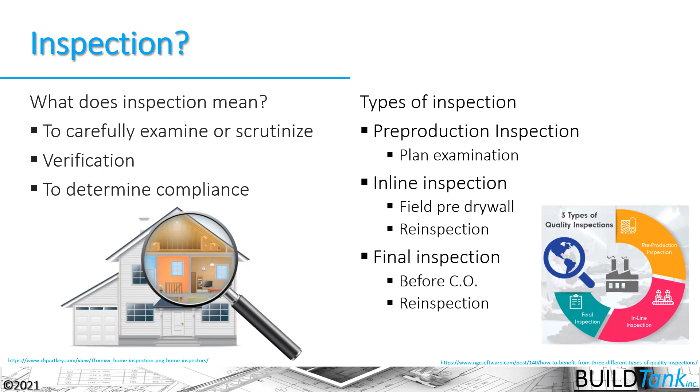So then we need to think about what's the next thing that comes up from a code perspective, and that's these things that are requirements. So things that are compulsory, things that are necessary, things that you have to do because the code says that in order to comply with it, these things have to happen in the house.

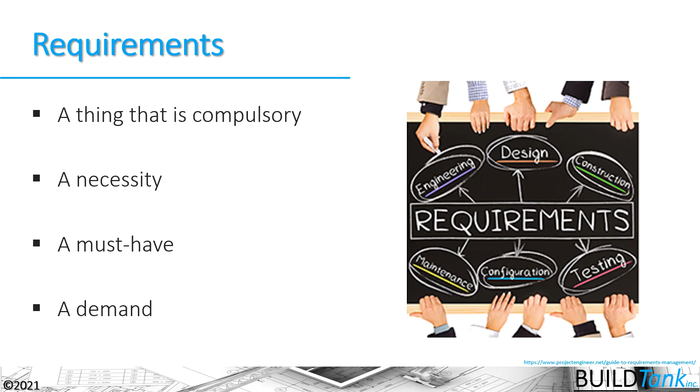A lot of these requirements in the past, before the 2021 IECC, we called those things mandatory. But there were actually things in the prescriptive path of the code that were also mandatory as well, regardless of the compliance path that you're choosing. So we need to talk a little bit about terminology.

So the first thing with regards to requirements is that the word mandatory has been removed from the IECC in the 2021 cycle. And it's been replaced by basically just this word requirements. The meaning is roughly the same. They are mandatory. They are things that you have to do. But these requirements, where they're found, the idea is that it's been made more simple and more straightforward,

because there were some things that were not labeled in the prescriptive section of the code as mandatory that turned out to actually be mandatory from the perspective of the code when you're complying using a non-prescriptive path of compliance in the code. And I'll show you some of those here in a second.

So the next question really is, what are these prescriptive requirements? Prescriptive requirements are things that can't be traded off, except when you're using the UA compliance pathway, which is embedded in that prescriptive path as well. Requirements that must be met using other compliance paths, including the requirements that are now in tables, could be considered prescriptive requirements as well.

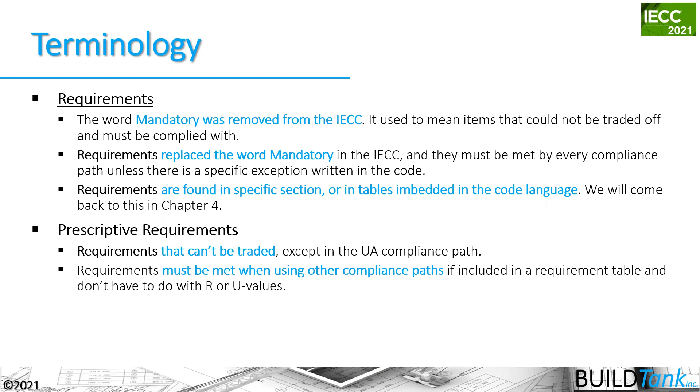So you'll see as we move forward here that a lot of the requirements that you're inspecting to are embedded in this prescriptive section of the code, but have been moved into a table in the performance sections of the code. That's sections R405 and R406, so that people don't forget that these things are actually a requirement of the code. So we have these prescriptive requirements, these things that we have to do regardless of the pathway.

And then we have this performance approach. And the performance approach brings in the notion of a trade-off. A trade-off is used to meet specific prescriptive requirements of the code unless there is a way to trade off that. So really the only things that we're trading off are U values and R values in the building envelope. All the other requirements are how you actually install something, how that works.

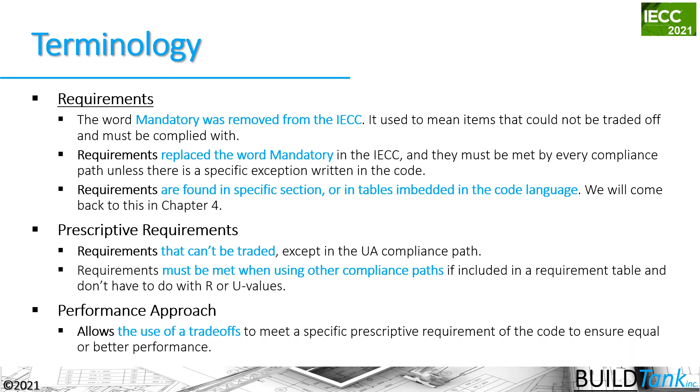So diving into trade-offs in a little bit more depth, a trade-off really refers to putting something more in one piece of the assembly of the house so that we can put something less in another piece of the house while maintaining an energy performance balance in that house. So the code is asking us to achieve a certain level of energy efficiency in that house. And the ability to trade things off gives us a little bit more flexibility in determining how we're going to build that house.

So again, you can trade off U values and house tightness and duct leakage and those types of things, but you can't change the overall energy balance in that house. You have to achieve what the code is trying to achieve. So if we look at this picture of this seesaw with the balls on it, you can think of the blue ball maybe as attic insulation. And I'm going to put in R38 here in climate zone 5. And the new requirement in climate zone 5 is an R60 attic.

And you can think of the three silver balls that are balancing out the equation here as maybe representing better windows or a tighter house or reduced duct leakage. And in that way, I can trade off less R value in my attic for better performance in my windows and in my air tightness and in my duct leakage requirements, while achieving that energy balance in the house. So that's what the trade-offs do, and that's ultimately how the trade-offs give us greater flexibility in how a builder wants to build their house.

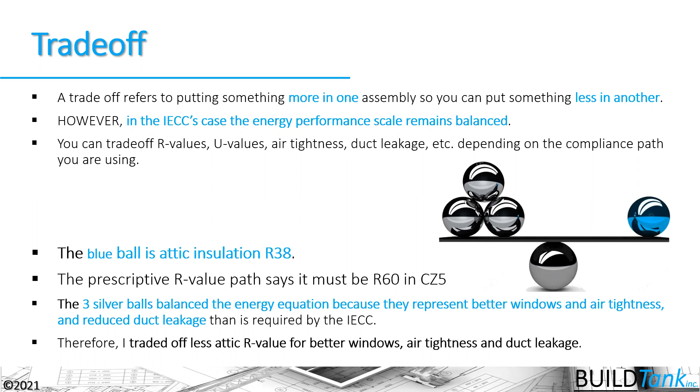So what we see here in the prescriptive sections of the code is we have these prescriptive requirements, these things that are mandatory that have to happen. For example, you have to install attic eave baffles if you have a ventilated attic. You have to install a vapor retarder over the crawl space dirt floor. When you're installing floor insulation and attics, there are specific requirements for how you install that insulation.

Now, this is where the confusion used to happen, is that there are also requirements for R value. And so you can trade off the R value component, but you can't trade off how the code says you need to install that R value. So again, in that floor system in Colorado here on the Front Range, Climate Zone 5, it says I have to install an R30 in that floor system.

And then it tells me 3 different ways of how I can install that insulation. Well, I can trade off the R value part of it, but I have to choose one of those 3 ways to install it, and I have to stick with that. That's ultimately what we're inspecting there. So from an inspection perspective, we might be looking at both the R value and how it's been installed. And that's really changed our thought process when we start talking about field inspections here.

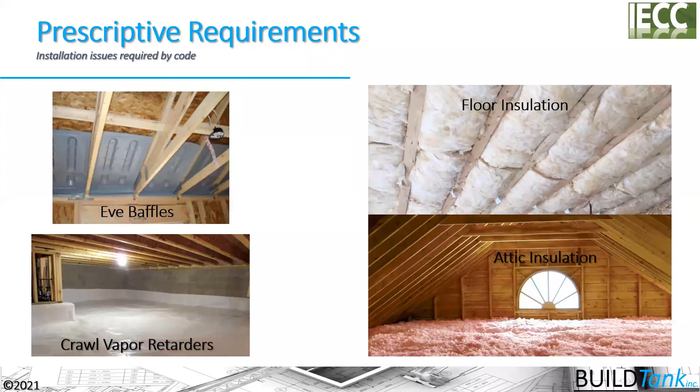But before we get to field inspections, we want to make sure that everybody realizes that a plan review is a type of inspection. You're reviewing, you're verifying what they are proposing to put in that house to achieve compliance. And on the Colorado Energy Office's website, there is a plans examiner checklist for the 2018 IECC and the 2015 and 2018 commercial, but on the residential side, we've updated it to just have the 2018. So if you aren't on the 2018 yet, this is still a very useful document to go to.

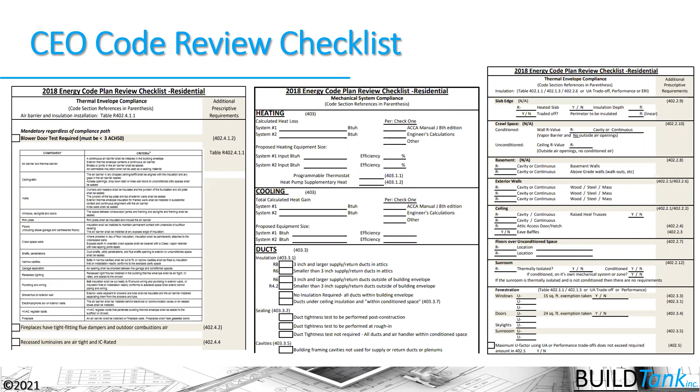It looks something like this, and it gives you a checklist format to go through the plan sets to make sure that all of these details are being addressed in those plans and that proposal. You can think of that plan basically as a proposal for what they plan to do, how they plan to build that house. And then the field inspection comes to basically ensure that they've done what they proposed to do. Okay, so let's go to our second poll question here.

The poll question says, how many compliance paths are there? I'll give you a few seconds here to look at that and answer the question. And what's interesting about these different compliance paths is that in certain sections, there are a number of compliance paths that are embedded within one section. So it'll be interesting to see how well we understand that.

Okay, here we go. So the majority of people say that there are 3 compliance paths. The next is 4 and the next is 5. So let's look at these compliance paths in more detail and see how many there actually are. When we look at the prescriptive U value and R value compliance paths, there are actually 3 compliance paths. There's one that's related to the U value, that is the assembly, and then there are 2 that are related to the R value. There's one R value approach that's assembly based, and one that's cavity insulation based.

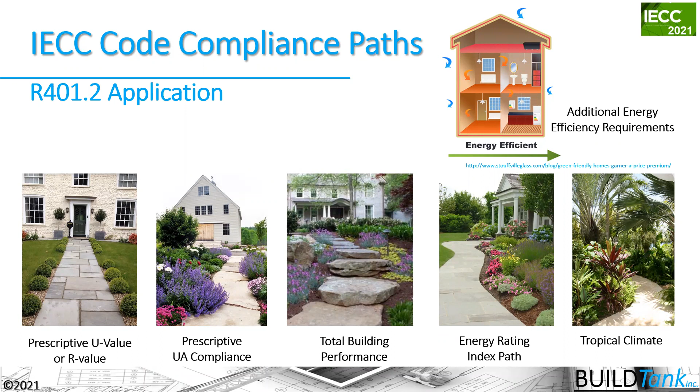So if you're using the U value or the R value or the area weighted U value approaches, you just need to choose one of the efficiency packages that are laid out in section R408. So that's a new section that's been added to the code. It's not really a chapter, it's just a new section that's been added to the code.

In the performance compliance pathway, you need to choose one of the efficiency packages that are laid out there. However, you can't model that additional efficiency to demonstrate compliance. So you still have to demonstrate that you're doing that package, but it's not going to be calculated when you're calculating the cost compliance mechanism to demonstrate compliance.

Or you can do a cost compliance that demonstrates that you're 5% better than the reference design. And with the energy rating index, they leverage that 5% better as well. So you don't actually have to do one of those prescriptive packages. You just need to demonstrate that you're 5% better than the reference home for the 2021 IECC.

Now, these additional efficiency packages include envelope performance, better HVAC equipment, more efficient water heating systems, more efficient HVAC delivery systems, or improved air sealing and ventilation systems in that house. So these are things that need to be inspected when we're looking at that house.

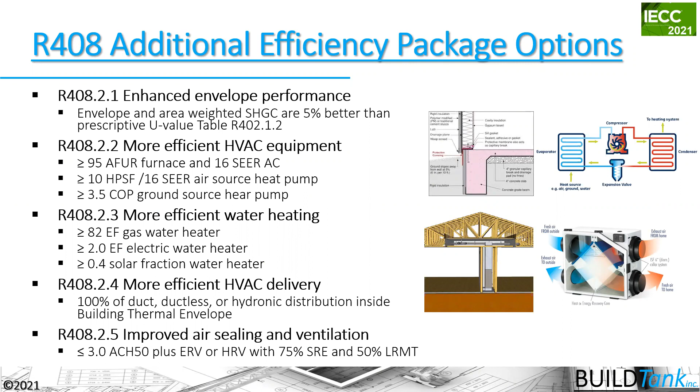So as we start moving to thinking about the true field inspections, we see that these different pathways through the code are looking for us to inspect certain things. So we need to remember that code officials or the authority having jurisdiction has the possibility of allowing a third party to do these inspections.

And it's really important to have clear and accurate communication between the third party and the authority having jurisdiction so that everybody knows exactly what they're supposed to be inspecting to demonstrate compliance, because sometimes jurisdictions think that a third party is looking at something and the third party didn't realize that's actually what they're supposed to be looking at.

This really came to light with the introduction of the energy rating index pathway in the code, because energy raters were going out there creating the energy rating index score, but they didn't realize that some jurisdictions were asking them to do other inspections on the house, including the air barrier and insulation inspections. And we have to remember the air leakage and duct leakage and ventilation testing as well.

With the simulated performance path or the building performance path, it's similar: the authority having jurisdiction and the third party can do the inspections, HVAC requirements, and the diagnostic testing as well.

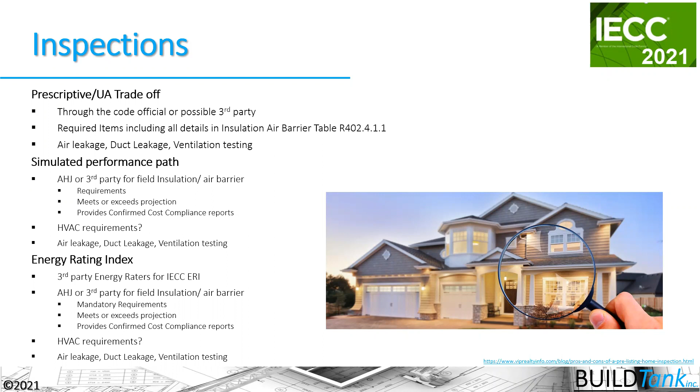Other requirements begin in Chapter 4, section R402, the building thermal envelope section. This is where all the prescriptive stuff used to be laid out, and it used to be called the prescriptive pathway. They actually removed the word prescriptive as well as mandatory from the code, and now everything's just requirements. But this is where the vapor retarder requirement is housed in the energy code, and it forwards you over to the IRC to look at those things as well.

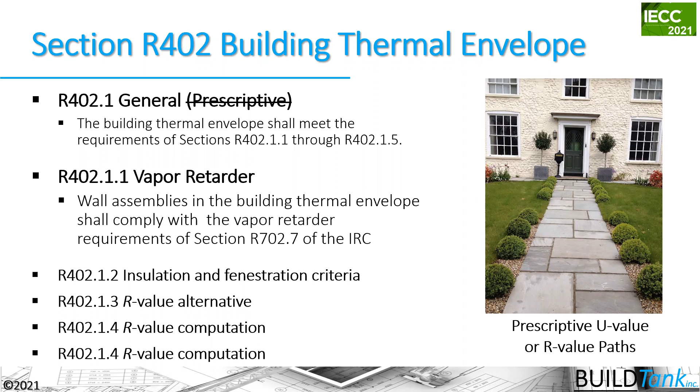And then it also talks about the different alternative approaches to demonstrate compliance using what we generally call the prescriptive path of the code. Now, regardless of the compliance path that you're using, how you install specific features in the home is outlined in this R402 section of the code.

So it talks about how the installation shall meet the specific requirements, and then it goes through ceilings and attic eave baffles, mass walls, floor systems, basements and slab-on-grades, all the way through sunrooms and heated garage insulation details that are called out in this section.

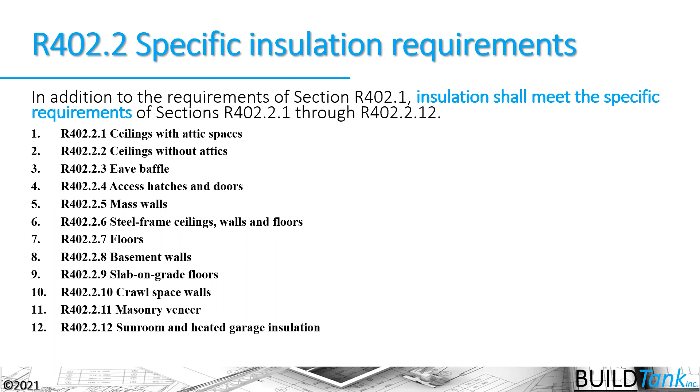So there are 12 things here that you need to inspect to, not only from an R-value perspective, but also a lot of installation guidance and requirements are embedded in this section of the code. This is embedded in what we call the prescriptive section of the code, that prescriptive compliance path.

And then we have these other compliance paths, really excluding the UA compliance paths, that are performance-based, and those energy compliances. In those performance paths, the total building performance and the energy rating index paths, the code has created these tables. These are the requirements that have been taken out of section 402, that prescriptive section, and put into this table so it's crystal clear that these are requirements for these performance sections of the code as well.

In order to demonstrate compliance, going back, you can see about four rows down, attic eave baffles, for example. Just because you're using a performance pathway for compliance, if you're doing a ventilated attic with soffit vents and a ridge vent, you still need to install the attic eave baffle. That's where the confusion came in earlier versions of the IECC—some people felt that if they're doing the performance approach, they don't need to install eave baffles and those types of things. That ultimately isn't true.

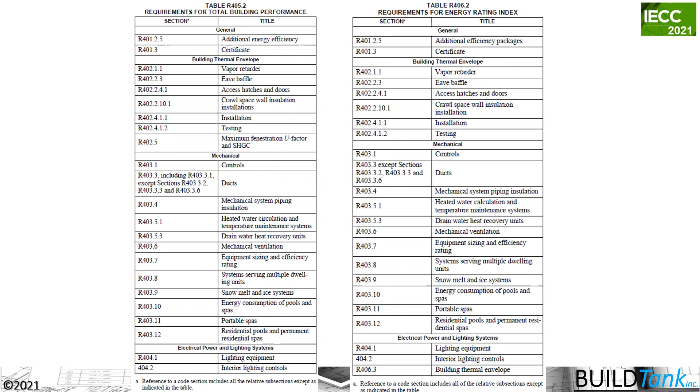So all of these things that are listed in these tables, in essence, become mandatory requirements for these pathways. They're the same requirements that are required in the prescriptive section. Therefore, all of these things are required regardless of the pathway you're choosing to demonstrate compliance. The only difference is that you're now able to trade off R-values and U-values when you move to these more performance-based compliance pathways.

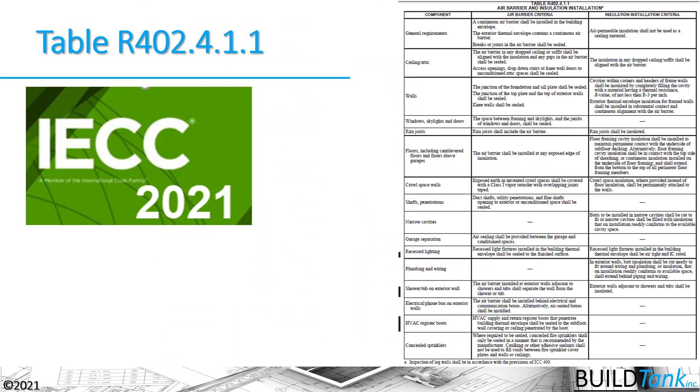So when we're inspecting, this is one of the tables we're inspecting to that gives us a lot of requirements to think about when going out in the field. This table can be thought of as a checklist, and the better you understand it, the better your ability is to achieve the air leakage requirements of the code.

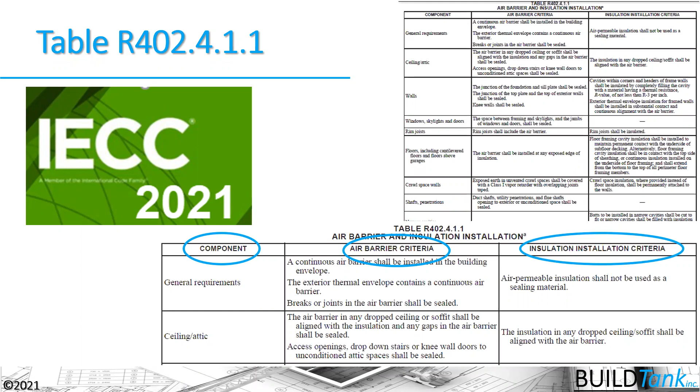The table talks about the different components down the left-hand side—the air barrier criteria and the installation of insulation on the far side of the table. It's been changed quite a bit in the 2021 IECC. First, the name has changed, so it's now called the air barrier, air sealing, and insulation installation table. The underlined sections here have been changed as well. Actually, all of the components on this slide, from rim joist down to footnote B, have been rewritten in this table to be more clear what's required, and also to refer you back to those specific sections covering, for example, basement walls or rim joists or other sections discussed in more detail in the prescriptive section of the code.

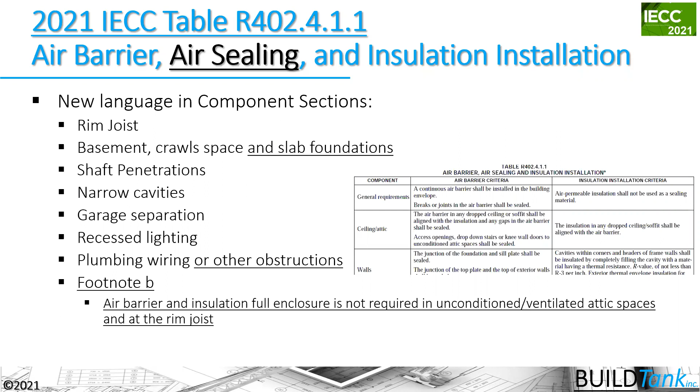So besides these things in section R402 that we need to inspect to, there are also more and additional requirements that need to be tested and looked at for verification of compliance. The first one comes in section R401, before we get to the different compliance paths—this is the creation of the label or certificate that needs to be posted in the house.

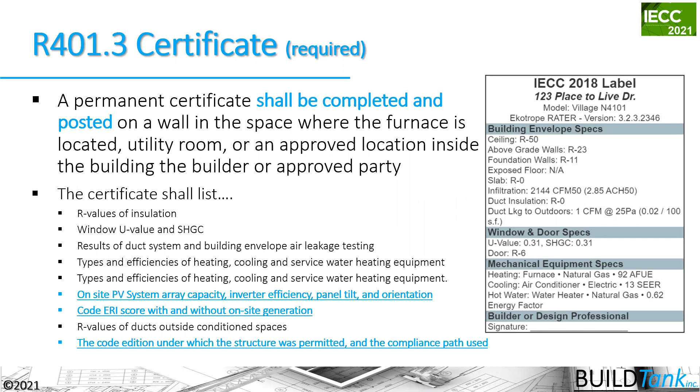Now, there are some new things in the 2021 that need to be on this label. We have on-site PV production, ERI scores, and the actual compliance pathway that needs to be added to these certificates. Although a lot of the certificates printed from software demonstrating compliance for the performance paths had some of this information before, the reality is that when you're using the prescriptive path, a lot of these certificates are created by hand. So you need to ensure that these things are on there and displayed properly.

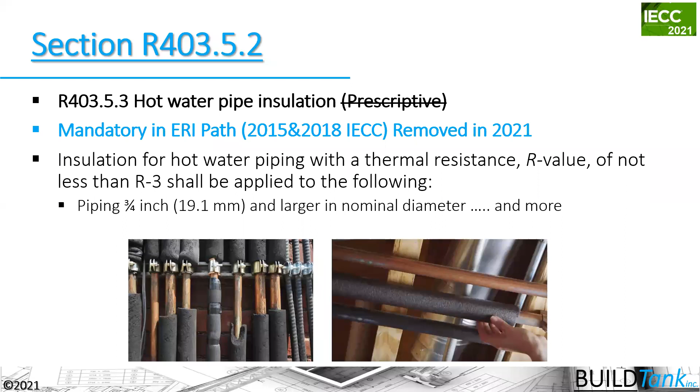Section 403 talks about hot water pipe insulation. This is a mandatory requirement. In the past, before the 2021 IECC, it was also made a mandatory requirement for the ERI pathway as well. So some of these things called out and displayed in the code only become a requirement if they've been installed. Now that's not necessarily true for pipe insulation, but for example, drain water heat recovery—there's no requirement to install it, but if you do see it in a house, then you need to look at this section and determine if it's being installed correctly.

So there are some things that are mandatory you have to install in the house, and other things that you don't have to install, but if the builder decides to install it, you have to follow the guidance given in the code, and you need to inspect to that guidance there.

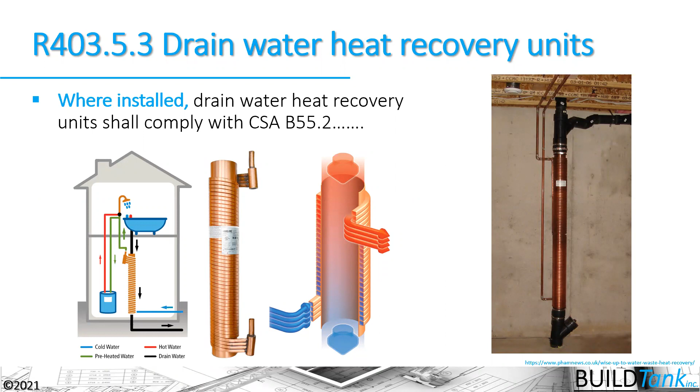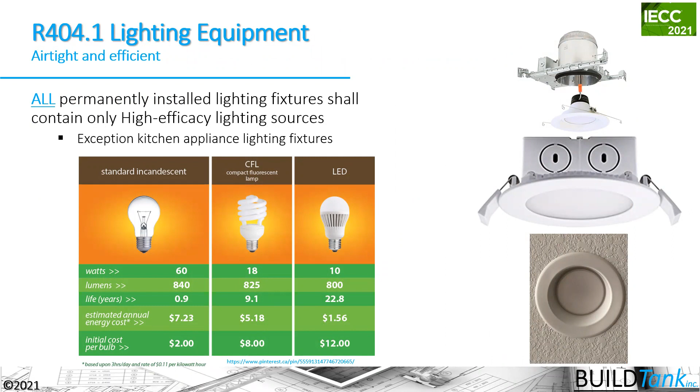Then we have things like lighting that has changed. Now all permanently installed light fixtures have to be high efficacy lighting sources instead of a percentage of the lighting in it. And in 2021, we need to also look at lighting controls. We didn't have to look at lighting controls before, and we didn't have to look at exterior lighting before either. So these are new things that we need to inspect to in the 2021 IECC.

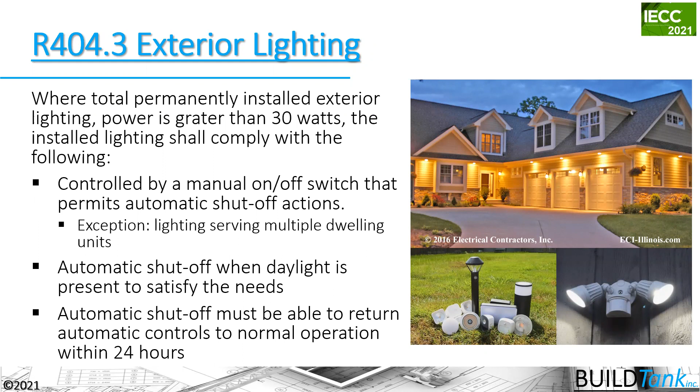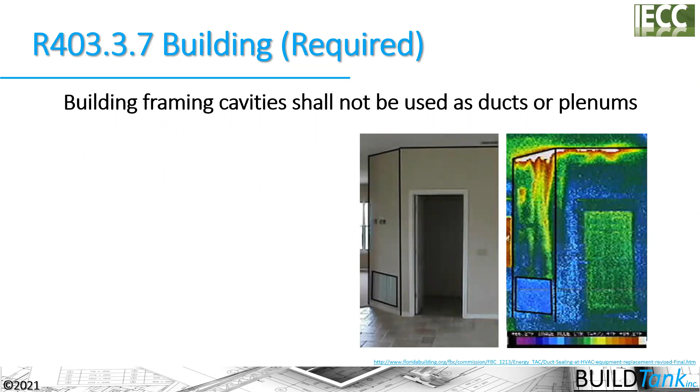Other things that continued in 2021 were: building framing cavities shall not be used as ducts or plenums. So when we have a code that may not be as clear as it should, or that there are potential ways out of doing that, we have to remember that the most restrictive requirement actually governs. This comes up with this particular requirement because in the IRC and the IBC, there are sections that deal with HVAC plenums.

HVAC plenums are really talking about the space within a wall cavity where duct can be run. It's being construed, however, that that plenum, that wall cavity, could actually be the duct. Well, this requirement in the IECC is actually more specific, and it says that you can't use that plenum for a pressurized duct, as displayed in this cavity, because you can see this return is returning some of the air from the house, but some of the air from the attic above on this ranch style house. So this is awfully hot in the summertime. This is when this picture was taken; it's extremely hot air that's returning back to the air conditioner to get reconditioned. It can really impact the efficiency as well as the long-term durability of the HVAC system, and potentially the air quality inside that house.

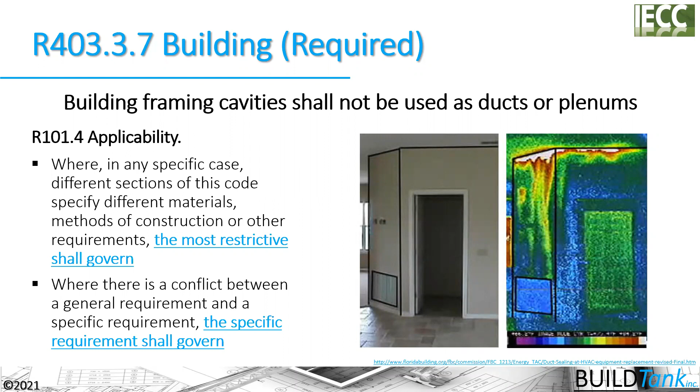So again, just thinking about which requirement applies to a specific house, and if there's discrepancy between those requirements, the most restrictive should win out in that battle, in essence, between conflicting requirements there.

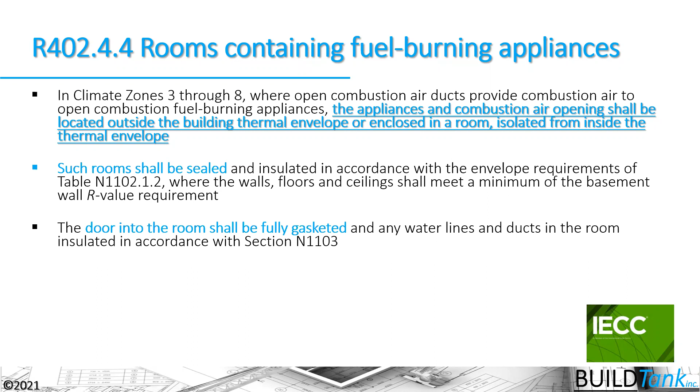Room containing fuel burning appliances — this is something that I don't think is inspected very well, potentially. Really any appliance that is a combustion-based appliance and the opening for the combustion... so if you have an atmospherically vented appliance, the best example, then that room needs to be an airtight room that separates those appliances from the conditioned space of the house. That room needs to include sealed doors that are fully gasketed, and all the insulation in the wall systems and floor systems that separate that space, because in essence you're saying that that atmospherically vented appliance is outside the building envelope.

So your building envelope is being constructed around that space. You have air barrier details, insulation details, gasket details — all of these things that you need to be looking at to ensure that that fuel burning appliance is separated from the conditioned space of the house where the occupants will be living. So that's a big inspection process for a small area of the house.

So those are kind of an outline of those details, and you can see that there's quite a bit there, but we also have these performance testing requirements in the code.

So let's ask our next poll question here: how many performance tests are required by the 2021 IECC? We'll give you a moment to answer.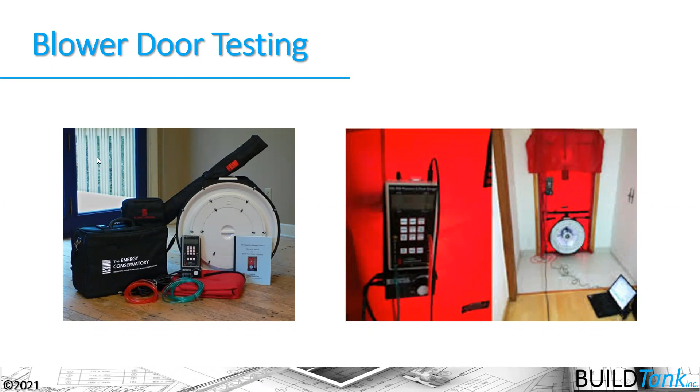The blower door test is a requirement of the IECC, so you have to determine how airtight the house is and if it met the requirement — less than 3 air changes in our climate zone here, zone 5, and less than 5 air changes in climate zones 1 and 2. We also have a duct leakage testing requirement, and the reality is, although it's not spelled out specifically and very well, you not only have a total duct leakage requirement to be tested...

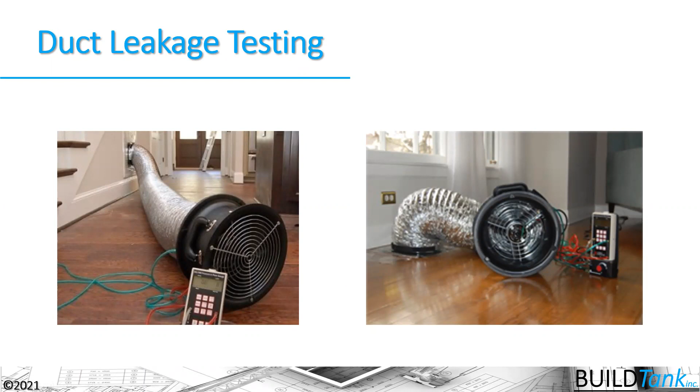But if you're using the performance path, you have a duct leakage to outside testing requirement so that you can quantify the ability to trade off tighter ducts in the house that are leaking less air to the outside for maybe less insulation somewhere in the building envelope. So now we have a total of 3 tests there if you're doing the performance pathways of the code.

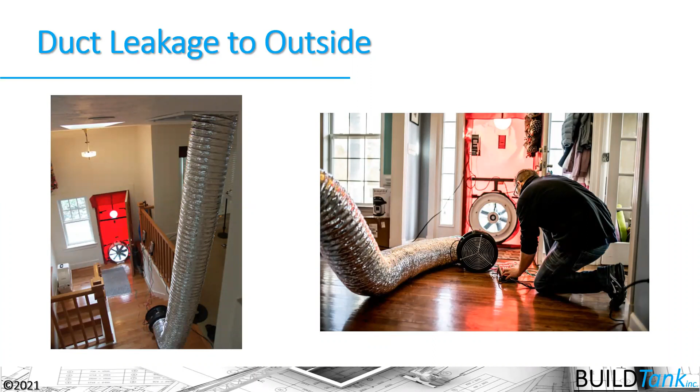But if you're just doing the prescriptive pathways, we have 2 tests that are outlined. And the 2021 IECC adds this additional test for testing ventilation systems and verifying that the flow achieved at our bath fans, our kitchen fans, and our whole house mechanical ventilation systems are actually pushing the air that's required. There is an exception to that for kitchen range hoods if it's ducted properly or in accordance with how it's laid out in the code here.

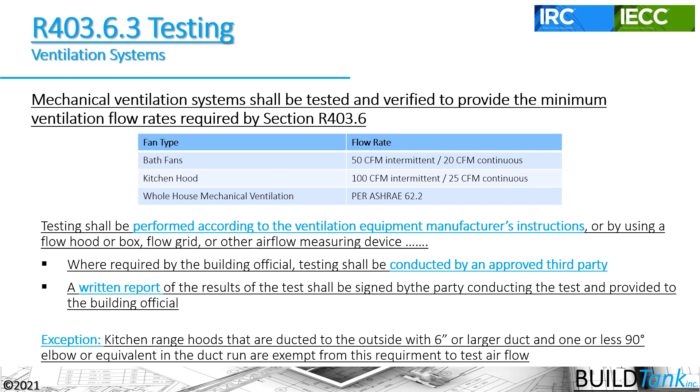But the reality is that most of these bath fans, for example, don't have the ability to actually push the required amount of air to ventilate that house, to get moisture out of the house well. So in reality, there are 3 basic tests that are required in the IECC, and then there's a 4th test, the duct leakage to outside test, if you're using the building performance path or the energy rating index pathway in the code.

So if you haven't looked at it, there is a section in the IECC that talks specifically about inspections that can key you into the different inspections that have to happen in the house, from footings and framing and rough inspections to plumbing rough inspections to mechanical systems, final inspections, and it actually even outlines re-inspections in this section.

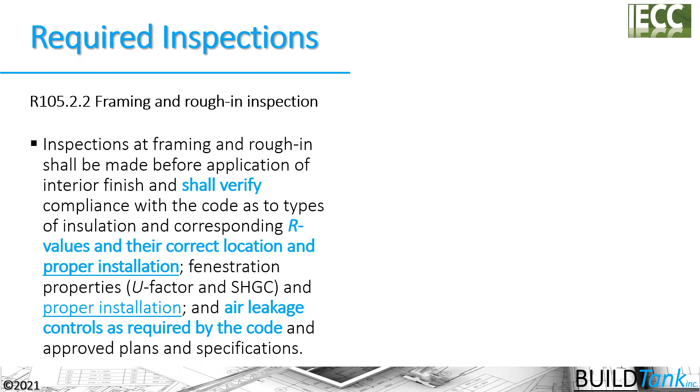Air leakage controls as well. Mechanical systems - it gets into needing to look at the system installation and the corresponding R values of the different components of that system, like R values of ducts in unconditioned space, the system's air leakage, so that duct leakage test, whole house ventilation, how it's been installed, and now we have to measure that as well.

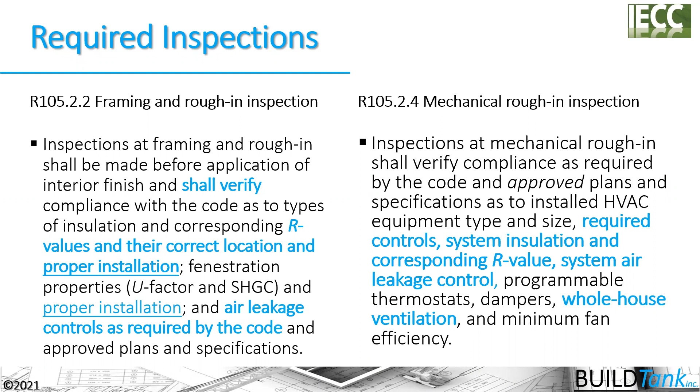So when we look at these different things, we can see that we're starting to really focus on verification of performance - how are things installed so they actually work? So it changes the way that we should be looking at this inspection process.

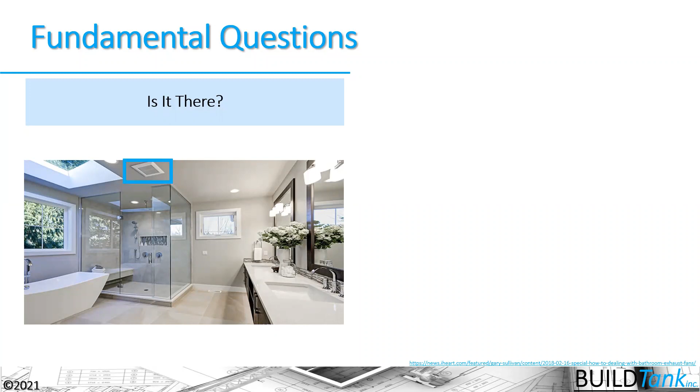Potentially, one thing that I find helpful is asking 2 questions when I come across a component that I need to inspect for compliance with the code. The first question is fairly simple: is it there? So in this case, I'm looking at this fan in the house, and yes, this fan is located in the bathroom. It's designed to get moisture up and out of that bathroom correctly in the right manner there. But I need to look at how that fan was actually installed, and does it have the ability to push the required amount of air?

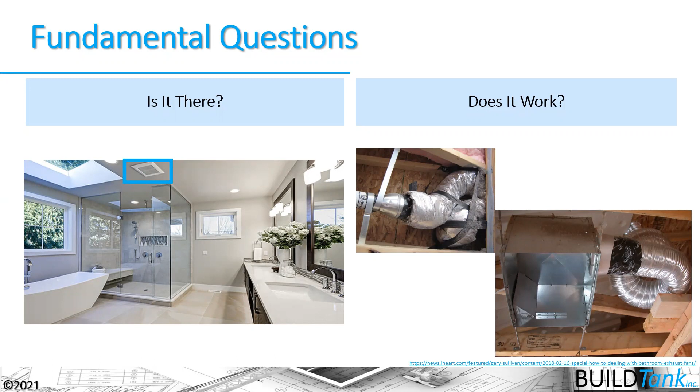Now, this inspection is super important to do at this rough stage, because if I wait for the verification that comes at the end now with the 2021 IECC, it becomes very, very difficult to actually get that fan to push 50 CFM of air, and or to replace this ductwork so that it can push that 50 CFM of air. Another example would be insulation.

I can't just walk into a house and say, yep, I see pink or blue or yellow or brown insulation in the wall systems here - I have to go a little bit deeper and look at how that insulation was installed, and is it being installed according to the code and the manufacturing instructions to actually perform and work here. Same with insulation and rim joist details.

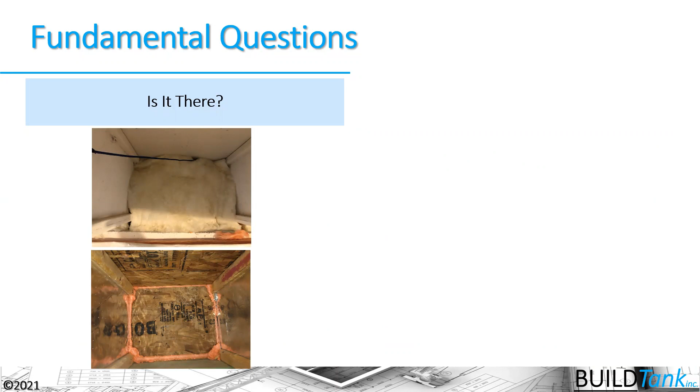Now, there are two things that we're looking at here. We're not only looking at the insulation, but we're looking at the air sealing details that are called out in the insulation and air sealing table in that code. So if I can see air gaps directly to the outside, I can see that it's not being air sealed correctly. But I also have to know that we're looking at sealing the rim joist to the slab.

We're looking at sealing the sill plate to the slab, and sealing the rim board to the sill plate and the rim board to the subfloor. Those are all areas called out in the code to air seal, and then we have to insulate that cavity as well. We don't have to look for an interior air barrier system, but in the 2021 IECC, it has been asked to ensure that that insulation maintains permanent contact with the exterior air barrier.

You can see how easy it is to install a batt in that location with a kind of crescent shape, so that the insulation isn't actually touching the surface it's intended to insulate. So it's there, but it's not working. It would fail its inspection.

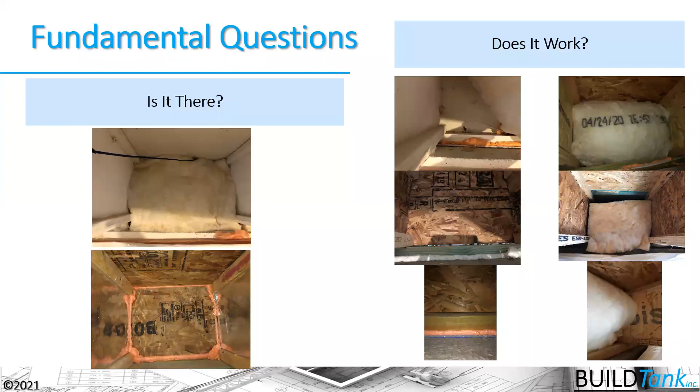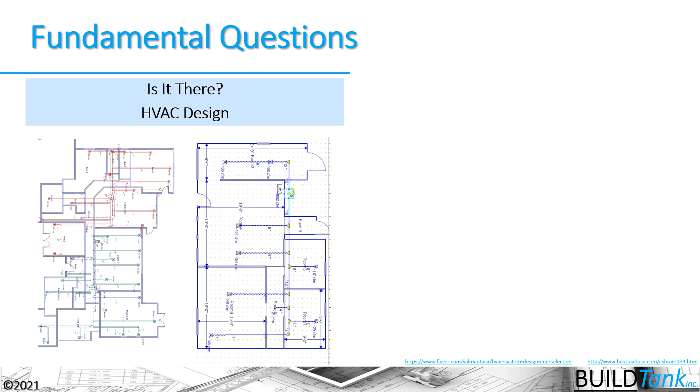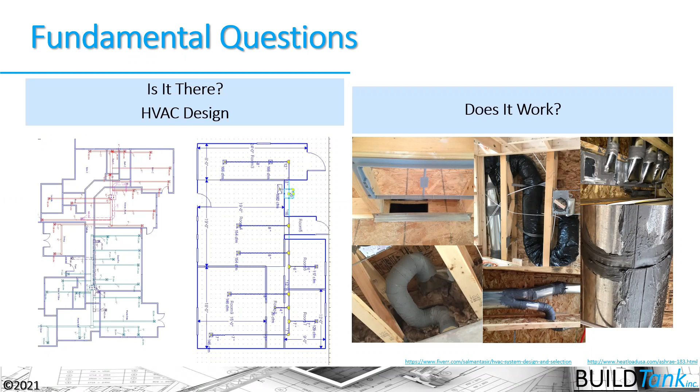HVAC inspections haven't traditionally been transferred to a third party at this point, but there are lots of things we need to look at with the HVAC system from the perspective of: is it there, and does it actually work? First, no building cavities should be used, but are these ducts run and installed in such a way that you're actually going to deliver the air that's proposed to be delivered in that room? It's super important to look at the installation, not just what's written down on paper.

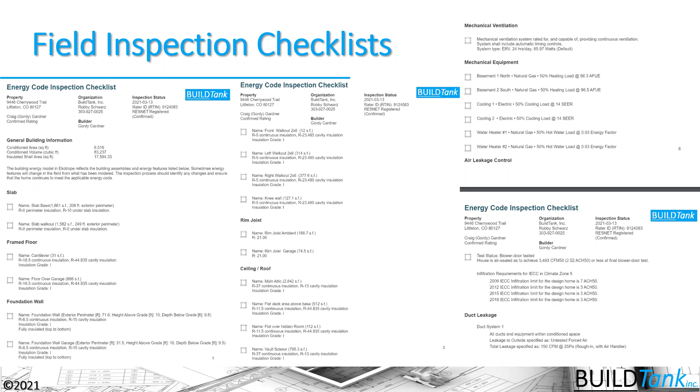There are some field inspection checklists to help guide you. These are generally printed and turned in with the UA compliance path, the building performance path, or the energy rating index pathway of the code. Personally, I don't find them that helpful because you still need to understand the core requirements. They can help highlight the R value of a specific assembly so you can determine if it's been achieved, but from the perspective of whether it was installed correctly and in accordance with manufacturing instructions and other code requirements, I'm not sure these checklists do much. Still, they're a resource you could take advantage of.

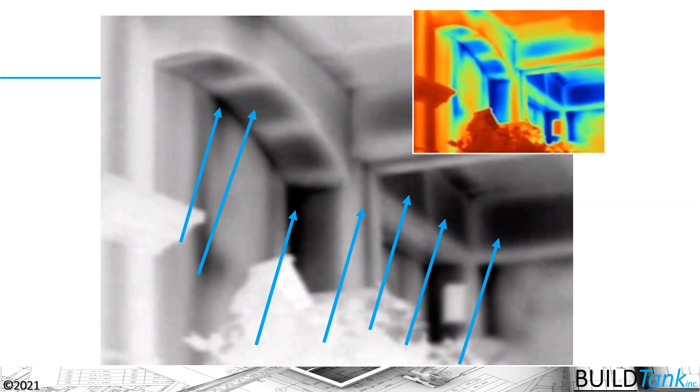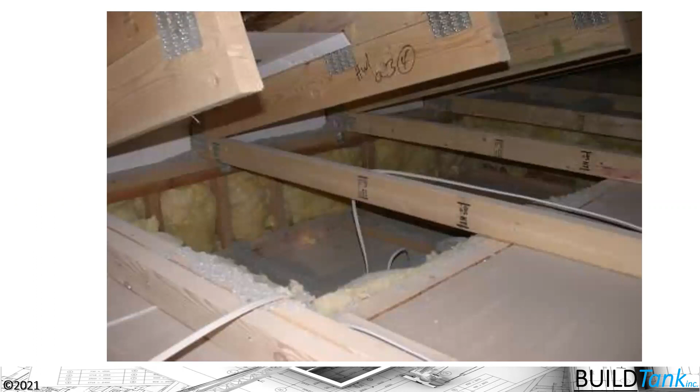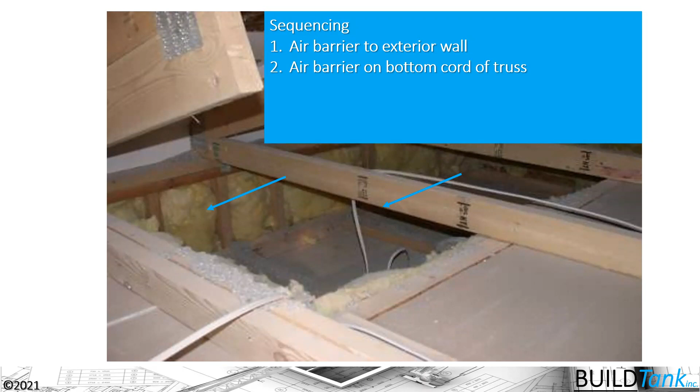Let's look at some things that are maybe difficult to inspect in the field - drop ceilings, for example. To make a drop ceiling work, we need to think about the sequencing of the code requirements. The code says we need to install an air barrier on the exterior wall so we can't see that yellow insulation. We've enclosed that air barrier - we could talk a lot about the building science there, but we don't have time. We also need an air barrier on the bottom chord of the truss. Then we can overframe the drop ceiling below, and insulate on top evenly across the attic plane. That way we have an assembly brought into the conditioned space that will actually perform.

So from that same perspective of - is it there and does it work - we need to do this inspection at the rough stage of construction to see if the framing has been done properly. This brings up the point that the majority of these air barrier details described in the code are really the responsibility of the framer, so it's at the rough inspection timeframe where this inspection would happen.

Another requirement that's kind of difficult to inspect: the code says we're actually allowed to reduce the R value of the material without doing a calculation - we don't have to move to the UA compliance pathway or the building performance pathway. We can just derate, or put in less R value, if that R value is fully covering the top plate. So we need to figure out how we're going to determine if the R value is covering the top plate, which means we should probably be looking at this at the rough stage of construction.

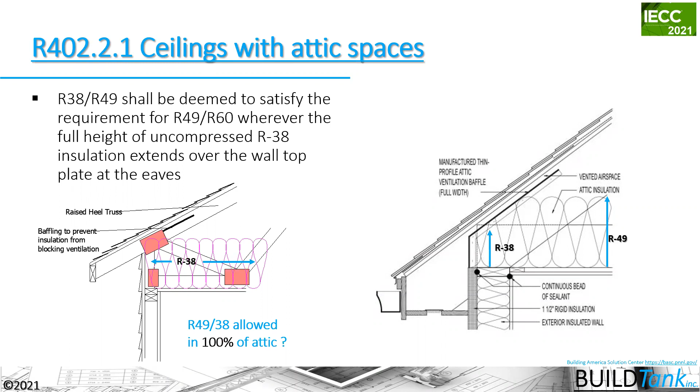So how is that eave baffle installed? Is it installed to the back, the outside, unconditioned side of that top plate, or is it on the inside? If it's on the inside, it wouldn't be compliant with the code, again, because we wouldn't be able to have full coverage over the top plate. So the junction of the top plate and the top of exterior walls needs to be sealed.

This section of the code is embedded in the table, and we know that the table, the air barrier, air sealing, and insulation installation table, is a requirement regardless of the compliance pathway. Therefore, we're guarding against what happens when you don't seal that drywall to the top plate that's adjacent to an unconditioned attic space.

You can see that if we're standing in the attic looking down at a top plate. The screwdriver is in a rather large gap between the top plate and the drywall. On the other side, the top side, it's a small gap, but if you add up that gap, the lineal feet of the gap multiplied times the size of the gap, you get a very large hole, and air moving through that hole gets filtered by the insulation, and that insulation turns black, like the picture is showing here.

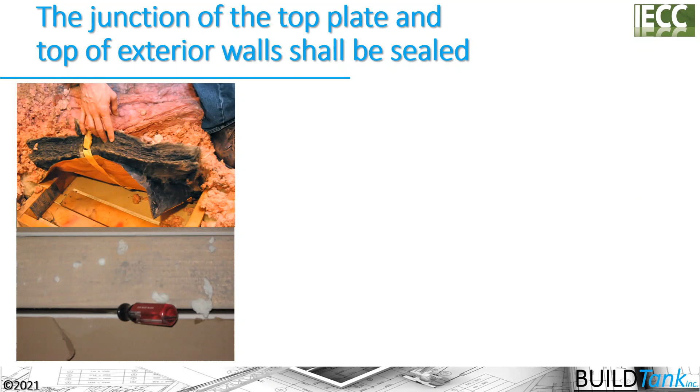So the code is asking us to seal the drywall to the top plate. You can use a gasket like sill seal. You can use other types of gasketing materials. You can use caulking materials to seal that drywall to the top plate.

But it's not just the four exterior walls. Exterior in this situation refers to unconditioned space, anything that is exterior of the building thermal envelope, outside the building thermal envelope. We've seen some misconstruing of what that word means. It's not the four exterior walls, it's whatever's outside, to that ventilated space, which means that all of the interior wall top plates need to be gasketed and the drywall installed differently so that it actually creates a seal there.

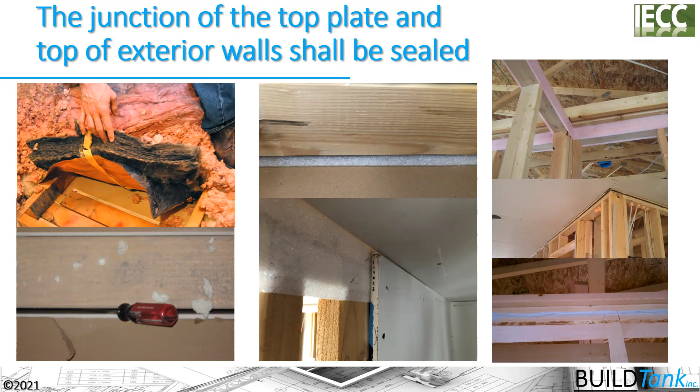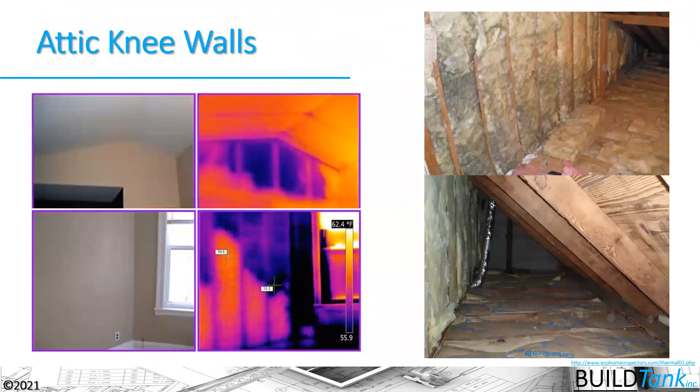Attic knee walls are another one of those sequencing mechanisms that we need to think about to get a system that actually performs. So we need a top plate, a bottom plate, side studs, some type of attic side sheathing, and then interior drywall to create that sixth side. Again, this is the requirement of the framer, so that the insulator has the proper assembly prep work done so they can insulate it properly when they come to the house after the framer's done framing the house.

We do come across some of these scenarios where we're starting to see trusses define the attic knee wall. And the problem with the truss in this scenario is that there isn't a cavity that can actually be insulated. There's not enough depth. There's not a top plate. This is drywall backing here. There's not a bottom plate. There's not attic side sheathing. And we don't have enough depth to get a decent R-value in that assembly.

So we should be pointing out that these types of assemblies need to be overframed. In this case, in this skylight shaft wall, it's defined by the truss. They've overframed to the attic side. They've put attic side sheathing there.

So we have an air barrier to the attic side. We have a top plate. They just need to figure out how they're going to detail the bottom plate in this scenario here.

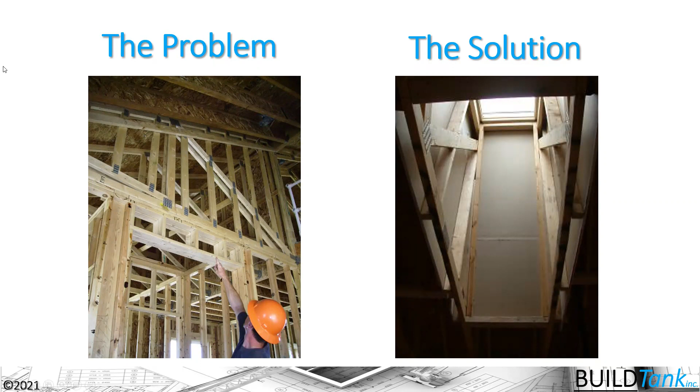We talked a little bit about rim joists and the requirement of the rim joist to air seal that correctly. So you're required to air seal the rim, the sill plates to the foundation. And remember that sill seal is a capillary break, not an air sealing device there. So you want to see some type of foam or caulk at that location to air seal that. But we also need to seal the rim board to the sill plate and the rim board to the subfloor as required by the code here.

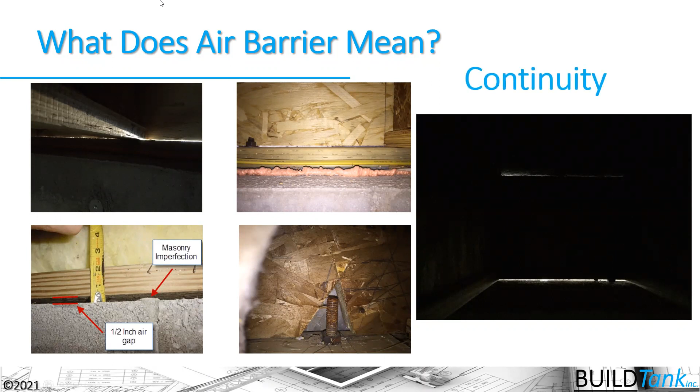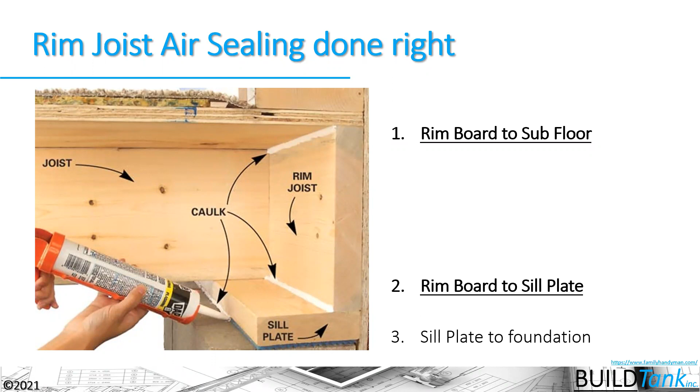We can just move to this slide here. We see that these are the 3 places where the code is requiring that we air seal this location of the house.

Floor cavity insulation is now allowed to be installed in one of 3 ways. Before the 2021, the main requirement was that the insulation needed to maintain permanent contact with the underside of the subfloor. And then choice 2 and 3 were exceptions in the code. Now the code is asking you to make a choice. You can choose to install the insulation in one of these 3 ways.

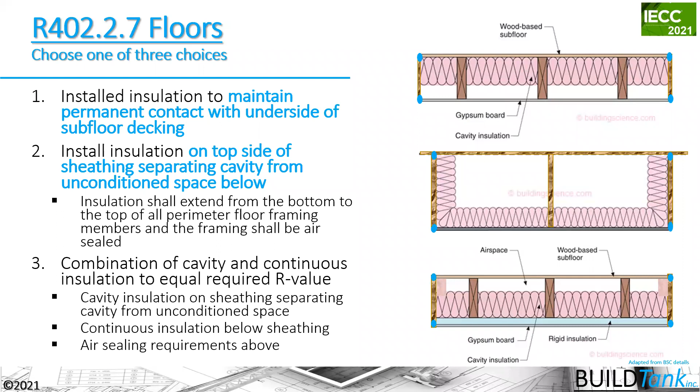So you're going to have to figure that out. And potentially you're going to have to remove some insulation to be able to see it and then put that insulation back there. But that's really what the code is asking us to do, is to verify that these installs have been done correctly in accordance to how the code lays that out.

Now, for stairways, it's also required, if that stairway is on an exterior wall, that we get an air barrier that goes continuously past the stair stringer there, or underneath the stairway where there's a stair platform. Are they going to insulate that and get the air barrier behind there?

How do we air seal connections between stairways and garage scenarios there, if that stairway penetrates into the garage? Well, we can put a supplemental air barrier there, or we can run the drywall completely past that assembly there to get the right assembly detail there.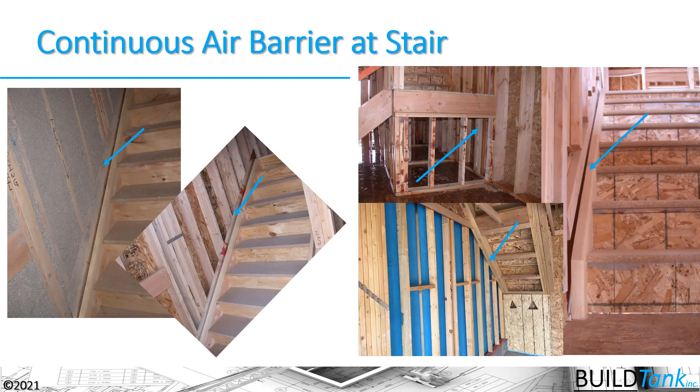Just a couple more that I wanted to show you here. There are lots of issues and lots of inspection points with attached housing and this shaft liner area separation wall. I just wanted to point out that there are new recently published BXUV guides from UL, Underwriters Laboratories, that are now allowing us to air seal these assemblies.

This gap between the drywall area separation and the framing that's holding that up. We're now allowed to air seal that, so we need to be looking for that air sealing as well. Otherwise, these assemblies aren't going to be able to meet the air leakage requirements.

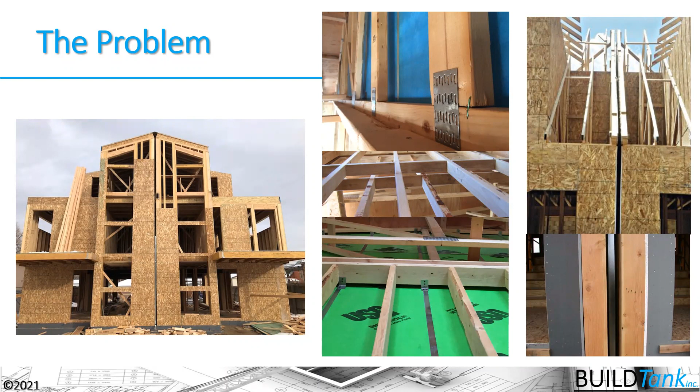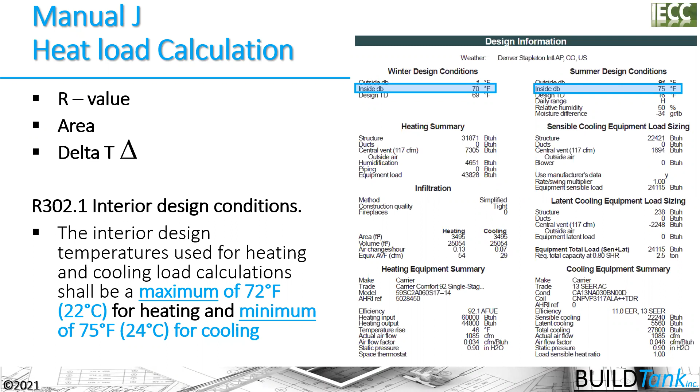Manual J and heat load calculations. How are we inspecting for these? Are we inspecting at a from plan scenario to ensure that we have the right design temperatures, for example, that we have the right building assembly components for that? And then what do we look for in the field for these scenarios? These are all questions that we need to be asking here.

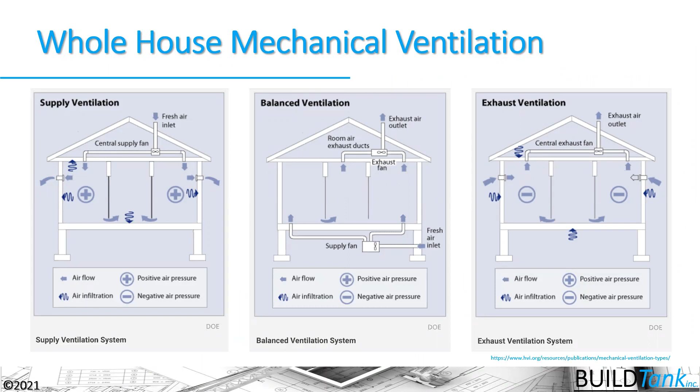Same with whole house mechanical ventilation. We need to have them determine what type of ventilation. Are they using supply, balanced, or exhaust ventilation at a from plans stage and plan review?

And then in the field, how has it been installed from a spot ventilation perspective, as well as from a perspective of whole house controlled mechanical ventilation? So let's ask our last poll question before we wrap up here. What fundamental questions should we ask when we perform field inspections?

And while you're answering that question, I happen to get a text with regards to sampling from an inspection perspective. Sampling generally is thought of when you're looking at air leakage or duct leakage testing. And sampling means that you're testing one in a batch of maybe 5 or 7 houses or 7 units. And if that one unit passes the inspection, then all 7 units pass in that inspection.

So it's generally done with multifamily housing that's sharing a common bigger building thermal envelope. But sometimes you'll see sampling that's allowed, especially for program compliance like Energy Star or LEED for Homes, for single family homes as well. In general, the code does not allow sampling. In the 2015 and below, you're allowed to sample using the simulated performance path for multifamily, specifically for blower door testing. But otherwise, you're not allowed to sample.

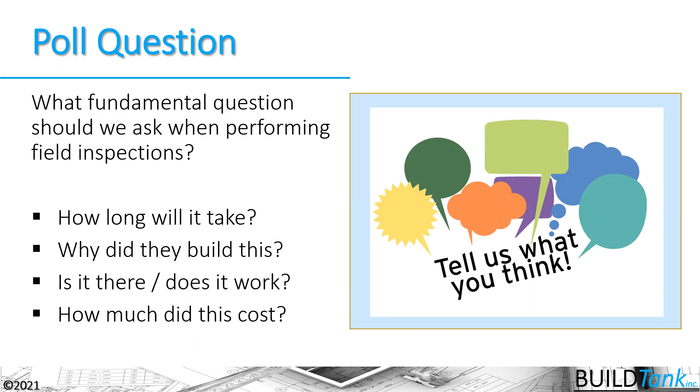Okay, so the majority of people, 97%, said, is it there and does it work? Yeah, that's what I'm trying to get at here, is that we're trying to ensure that our assemblies are actually performing as they've been installed and constructed. So our inspection process is really happening at plan review, at a rough inspection perspective, and then at a final certificate of occupancy perspective. We're doing some level of inspection at final before we issue that certificate of occupancy.

But if we can incorporate this notion, this philosophy of is it there and does it work, then we're going to have an inspection process that is really working well with the intent of the IECC to create houses that perform and perform well.

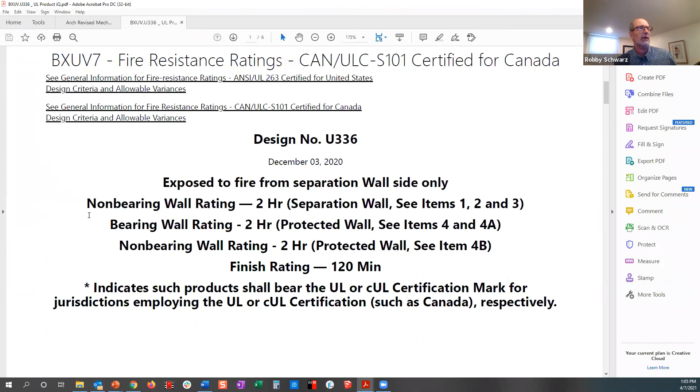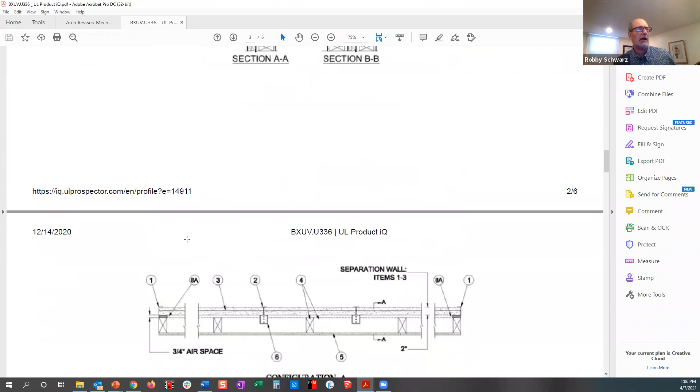Here's an example of a BXUV guide, if you can see the screen here. It goes down through the specifics of the assembly and different ways of constructing it. This is the typical shaft liner area separation wall. When you get down into these numbers, it tells you what each of these numbers refer to. Number 3, for example, refers to the 2 layers of 1-inch gypsum board liner that separates the 2 units. That's the true fire barrier between the 2 units.

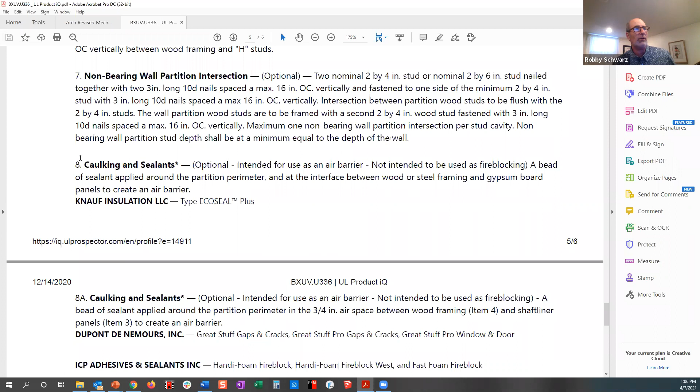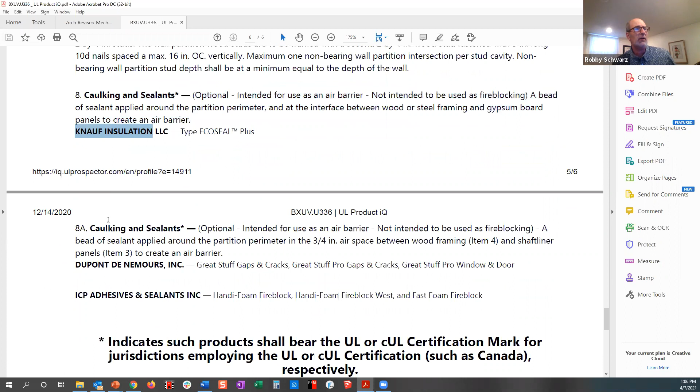And then you get down here to number 8, and this is new to these guides. It says caulking and sealants, and you can use Knauf Eco Seal, or a DuPont product or another sealing product to seal it. It's not intended to be a draft stop or fire blocking material, but you can air seal that gap now, and then put the fire blocking like fiberglass or rock wool on top of that material. So that's where you would look for that assembly.

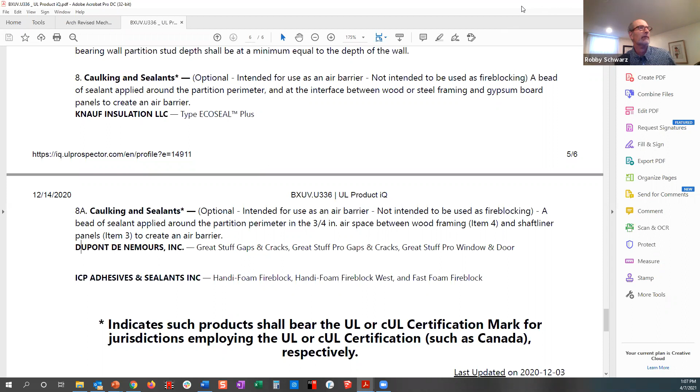Thanks, Robby. Patrick followed up on cost compliance: cost of materials installed or cost of energy needed to heat or cool? That's energy cost, right? Yes, it's energy cost. Okay, great. And then one more typed question, and then we do have a raised hand. What material do you recommend using for an air barrier? Would a Tyvek type covering material work?

Potentially Tyvek could work, but the majority of times when the code is talking about an air barrier, it's talking about that supplemental interior air barrier that's taking the place of drywall that's not adjacent to the insulation. So a rigid material works much better than a flexible material. Builders are having their best results with Thermo-ply, which is a foil faced cardboard type material, or OSB or drywall.

Tyvek is really a weather resistant barrier that's installed on the outside of the house that can be a supplemental air barrier to your primary exterior air barrier, which would be your OSB or plywood sheathing on the exterior of the house. So I would recommend Thermo-ply.